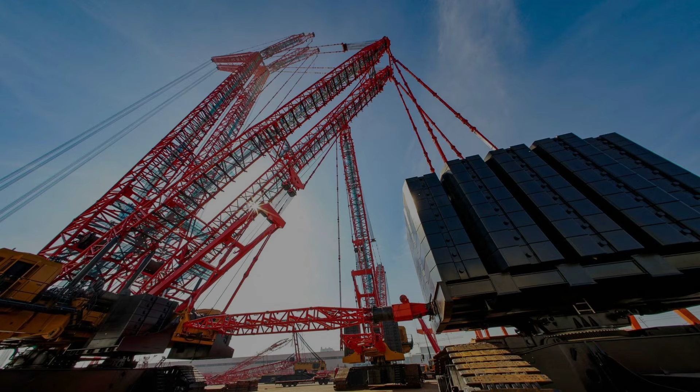In 2021, a single Chinese crane lifted 4,500 tons, shattering every previous engineering record and pushing human precision to 0.5 millimeter. By 2024, giants even larger could drive themselves 500 kilometers across open highways, cutting project times and costs overnight. Billions now hinge on these machines. One calculation off means disaster, and yet their mobility could rewrite the economics of global energy.

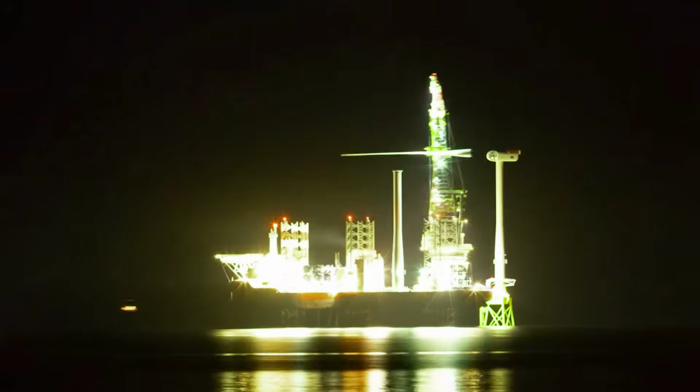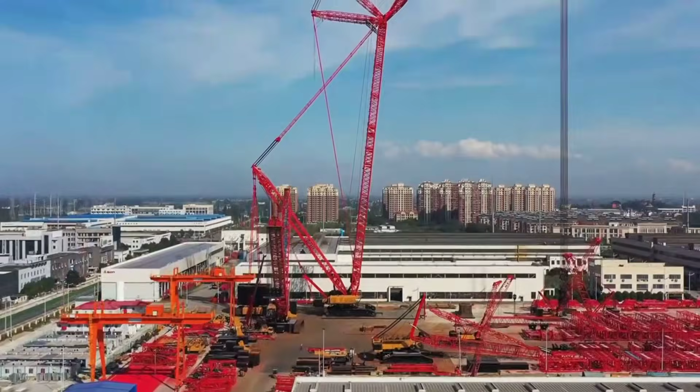How did China leap so far ahead? And where does this race for power lead when steel and physics finally reach their limit? Steel towers arch skyward, dwarfing city blocks and shipyards alike. At the heart of this engineering contest stands the Sany SCC45000A, a mobile crawler crane whose statistics read like science fiction.

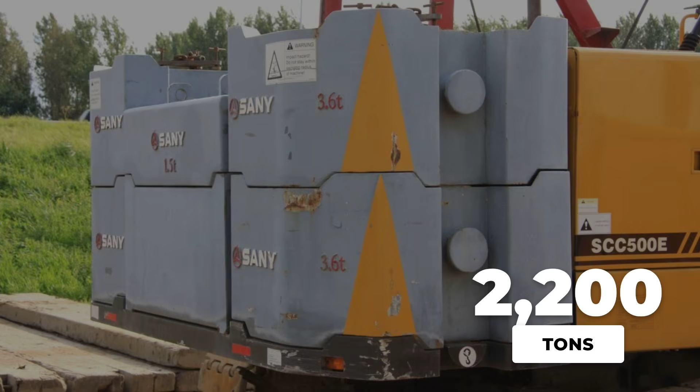On October 13, 2021, it hoisted 4,500 tons in a single lift, an act that required 98,000 ton-meters of force and a boom stretching up to 216 meters. The foundation of this feat is a counterweight system totaling 2,200 tons, balanced with laser alignment to within 0.5 millimeter.

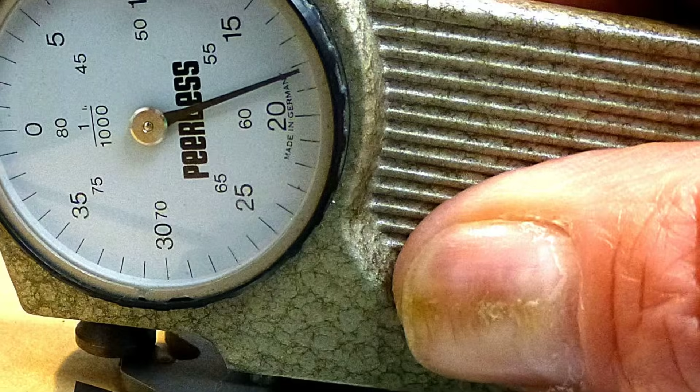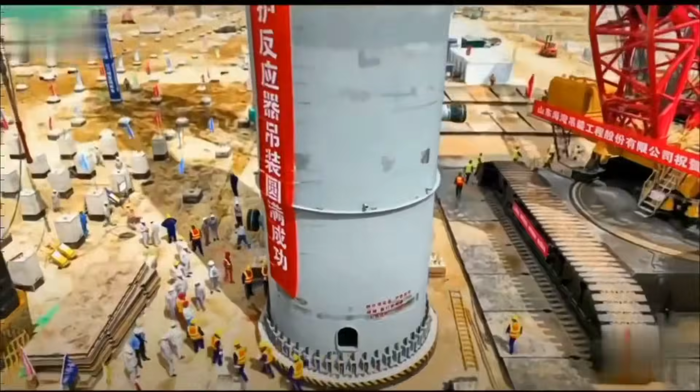Operators describe the process as walking a tightrope with steel and concrete, where a deviation smaller than a fingernail could send $500 million in equipment crashing to the ground. Behind the numbers, the SCC45000A is more than just brute force. Its modular design means 95% of its parts are interchangeable with Sany's other ultra-heavy cranes, allowing it to be split into two 2,000-ton machines for complex sites.

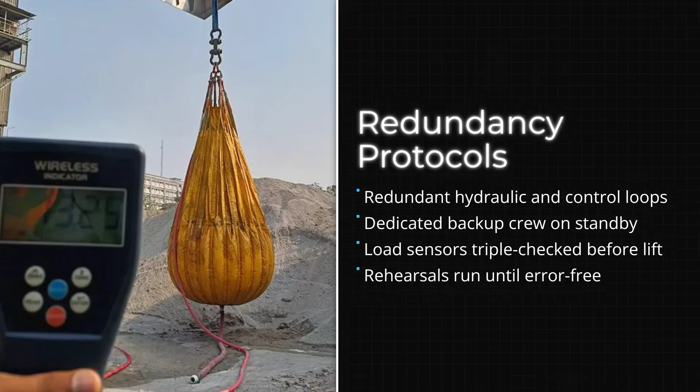The logistics are staggering. Moving the crane demands at least 200 flatbed trucks, and assembly is a ballet of engineers, riggers, and sensor teams. According to Sany's lift planner, every major operation is a rehearsal for disaster. Redundant systems, backup crews, triple checks on load sensors, and redundant rehearsals are mandatory. One missed reading, and you lose everything.

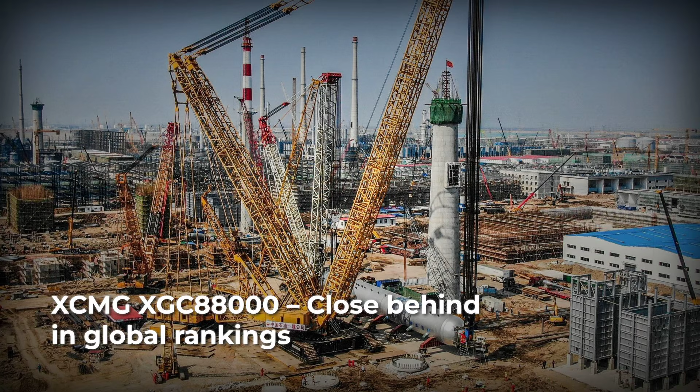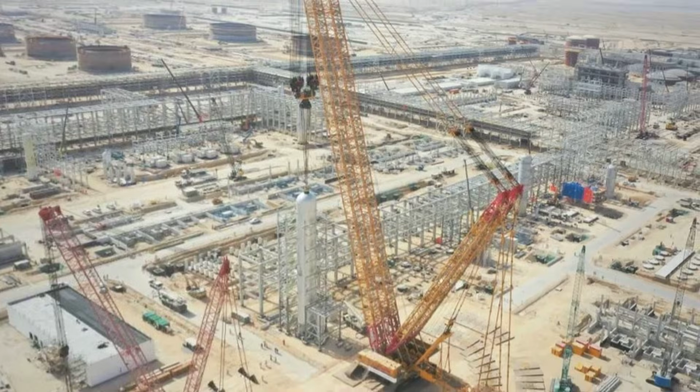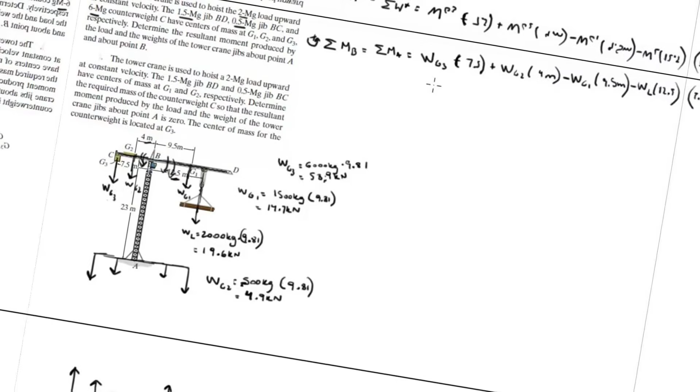The XCMG XGC88000, close behind in the global rankings, boasts a 4,000-ton capacity, powered by 3 Cummins engines, delivering nearly 2,000 kilowatts. Its boom also stretches 216 meters, and the entire structure is designed for rapid reconfiguration on petrochemical sites and offshore platforms. In these environments, the load moment, the product of weight and distance from the pivot, becomes the ultimate test. An 88,000 ton-meters moment means the crane must counteract forces that would buckle most city bridges.

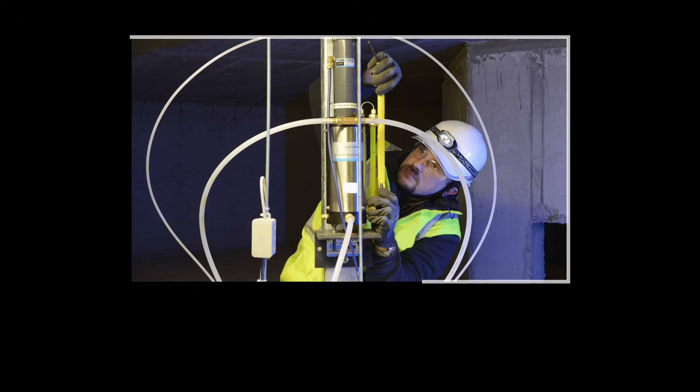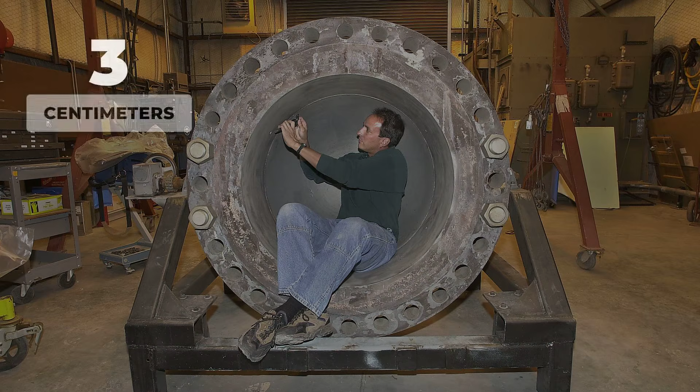The margin for error is measured in tenths of a millimeter, monitored by laser-guided systems and ground settlement sensors that halt operations if the Earth shifts by as little as 2 millimeters. On the nuclear frontier, the Sany SCC36000TM specializes in precision. This 3,600-ton giant is engineered for reactor dome placement, where 3-centimeter accuracy is not a luxury,

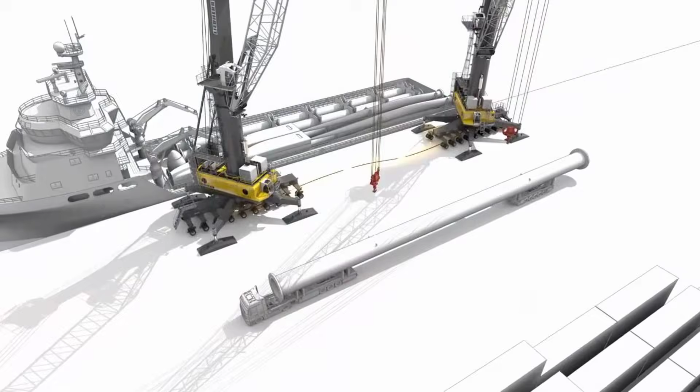but a regulatory mandate. Its laser guidance system, combined with adaptive control algorithms, synchronizes every movement of the boom and counterweight. During a typical reactor lift, ground teams monitor live data from gyroscopes and strain gauges, making split-second adjustments to keep the load perfectly vertical. The consequences of error are measured not just in dollars, but in lives and national safety.

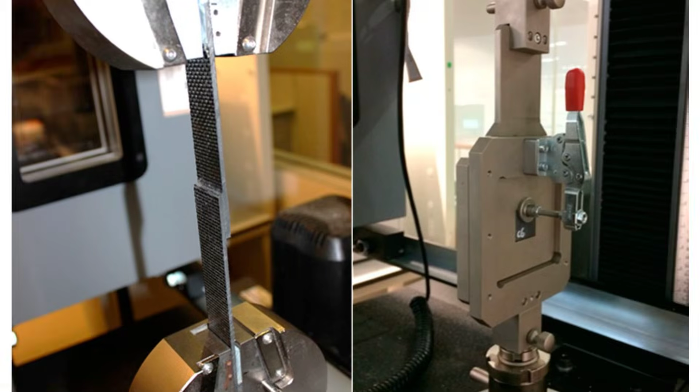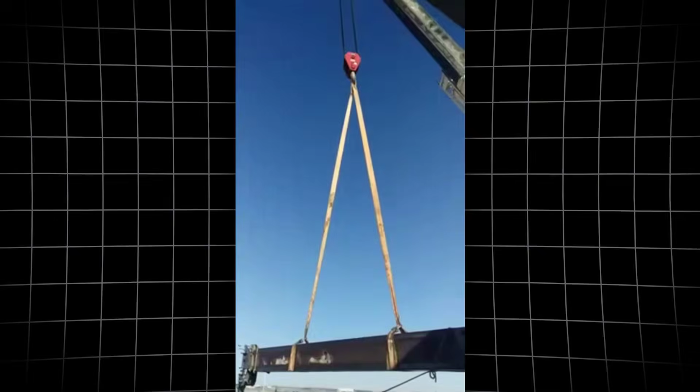Together, these 3 cranes represent over $15 billion in market value and the physical limits of what current materials and engineering can achieve. Each year, they complete dozens of major lifts, with documented safety records built on thousands of hours of incident-free operation. Yet the industry has reached a point where adding more steel or height is no longer the answer. The race for raw tonnage has collided with the boundaries of physics. What comes next is not just about size, but about how these giants move, adapt, and redefine the economics of construction and energy on a global scale.

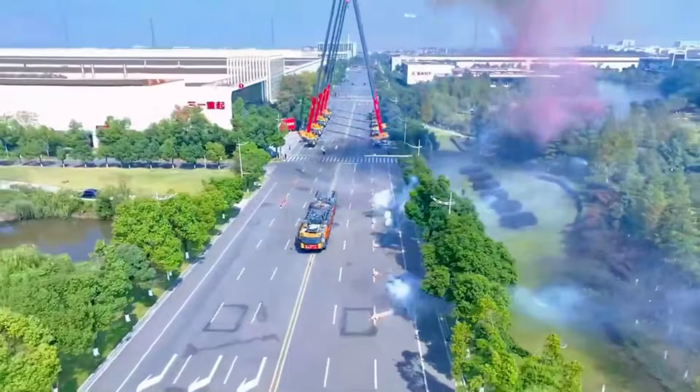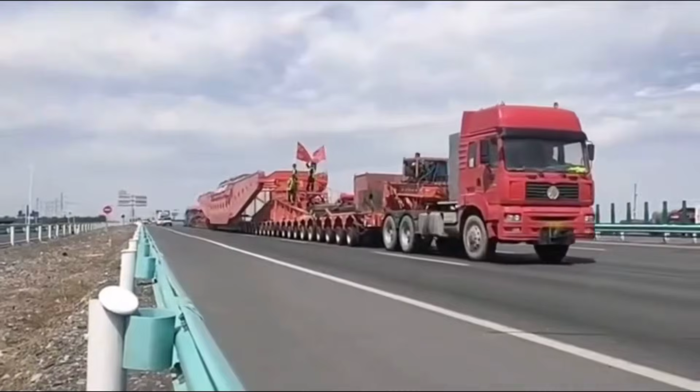On a cold December morning in Inner Mongolia, a machine the length of a blue whale rolled off the expressway under its own power. The Sany SAC40000T, delivered just weeks earlier, arrived at a wind farm site not by train, nor by a convoy of hundreds of trucks, but as a single, road-legal unit. This was no ordinary move.

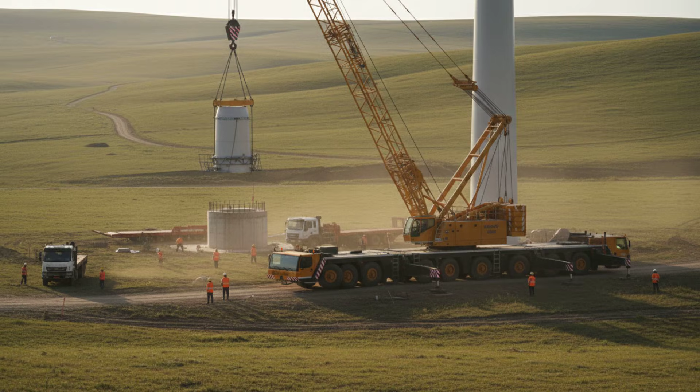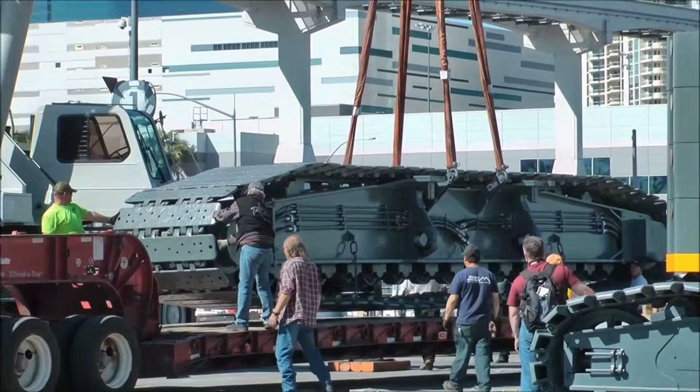The savings were immediate. In the past, relocating a crane of this size between wind farms meant shutting down roads, dispatching 200 or more trucks, and spending over a month on disassembly and reassembly. Each move could cost $2 million in labor, permits, and lost time. With the SAC40000T, the team covered 500 kilometers between sites, cutting deployment from 45 days to just 12.

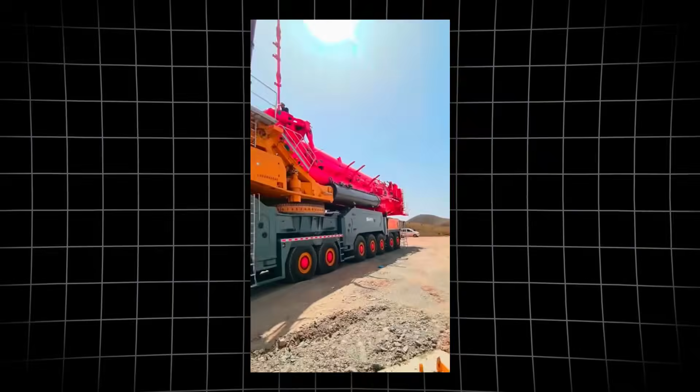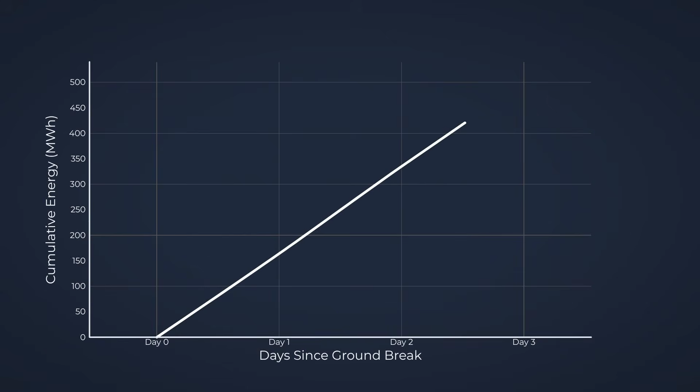During the 6-week pilot, crews installed 18 turbines, each tower rising over 150 meters without pausing for the traditional bottlenecks of logistics. The difference was measured not just in time, but in money. The reduced downtime meant the wind project generated power weeks ahead of schedule, unlocking revenue that would have otherwise been lost.

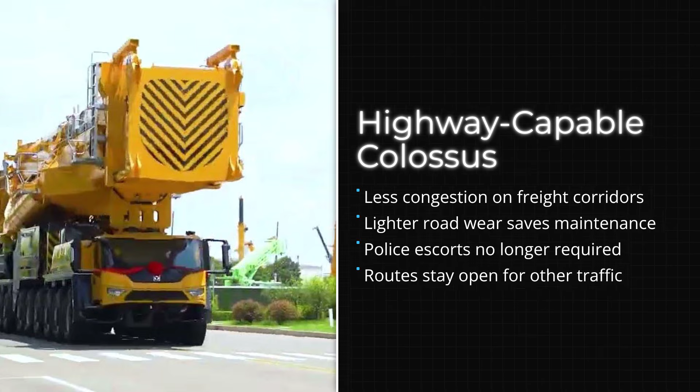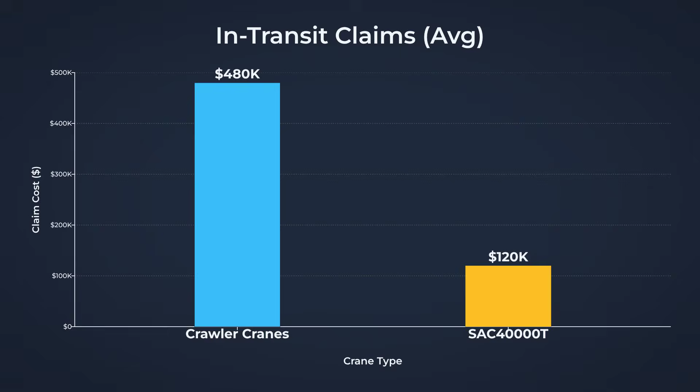Logistics contractors on site noted the ripple effect. Fewer trucks meant less congestion, lighter road wear, and no need for police escorts or route closures. The crane's design, distributing weight across 540 wheels, allowed it to cross bridges and highways engineered for China's new energy corridors. Insurance underwriters, usually wary of moving such massive loads, reported lower claims for in-transit losses compared to traditional crawler cranes.

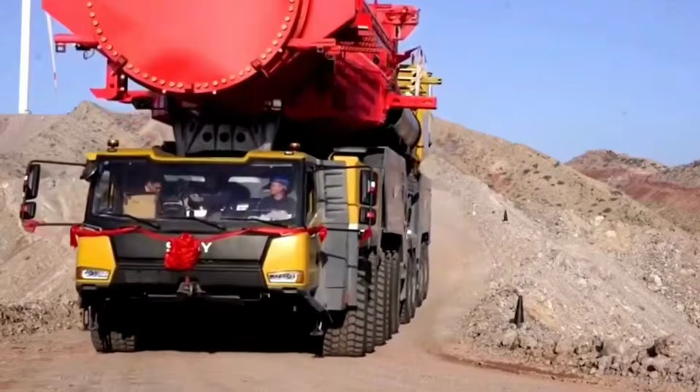The SAC40000T's mobility is more than an engineering showcase. It is a calculated answer to the demands of China's fast-growing wind sector, where a missed weather window can stall a project for months. For project managers, the ability to relocate a 4,000-ton crane in days, not weeks, means capital is freed up and assets are never idle.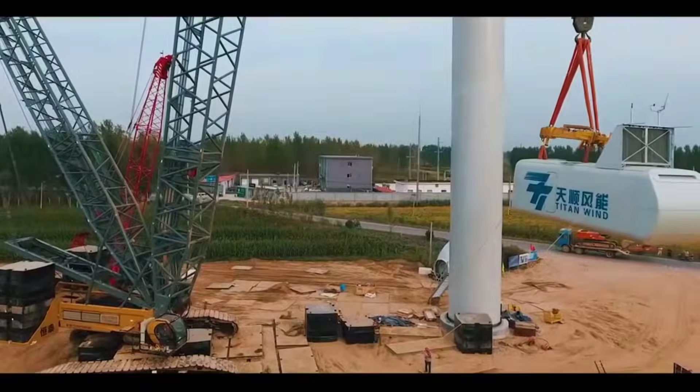Yet this mobility comes with boundaries. The same 9-axle, road-legal design that powers across China would be blocked at the border in Europe or the United States, where axle weight limits and fragmented permitting regimes make such machines illegal on public roads. For now, the true impact of the SAC40000T is felt where modern highways and regulatory fast tracks align, primarily in China's interior, where wind farms race to meet national energy targets.

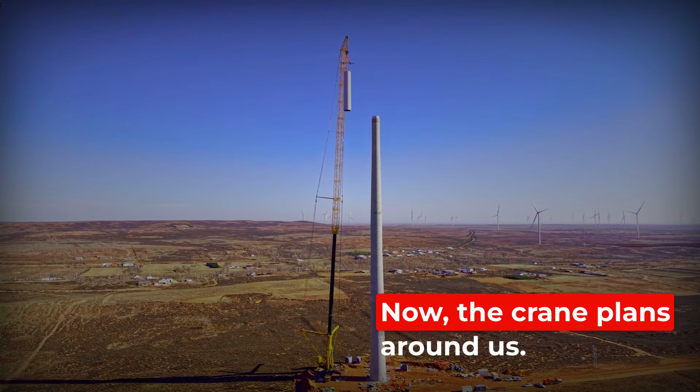As the industry pivots from pure lifting power to deployment speed and cost efficiency, the SAC40000T stands as proof that the future of heavy lifting will be decided as much by how quickly a crane can move as by how much it can lift. In the words of the Inner Mongolia project manager, "We used to plan around the crane. Now, the crane plans around us."

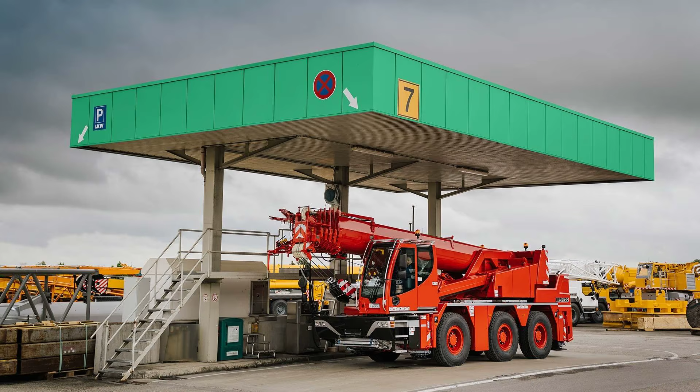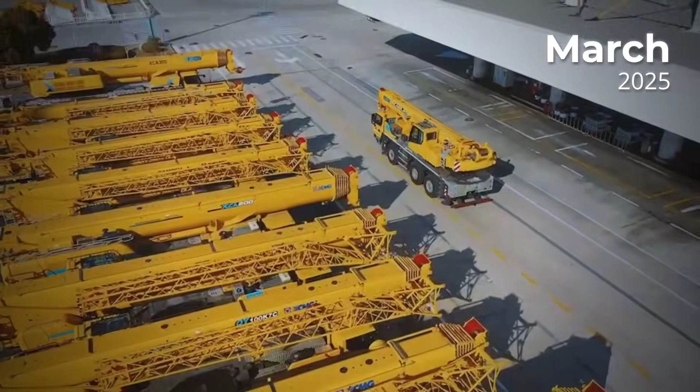Diesel engines have powered the world's largest cranes for decades, but the industry's appetite for fuel is staggering. A single heavy lift shift can burn through 2,400 liters, equal to the daily emissions of 80 passenger cars. With 2030 carbon neutrality targets looming in both China and Europe, regulators are forcing manufacturers to rethink every aspect of crane propulsion. In March 2025, XCMG introduced the XCA60EV, a 60-ton hybrid crane designed to cut fuel consumption by 65%.

It is a partial solution, effective for smaller lifts, but the physics of batteries and motors have yet to scale for the true giants. For cranes above 1,000 tons, diesel still dominates, as the energy density required for multi-hour operations remains beyond current battery technology.

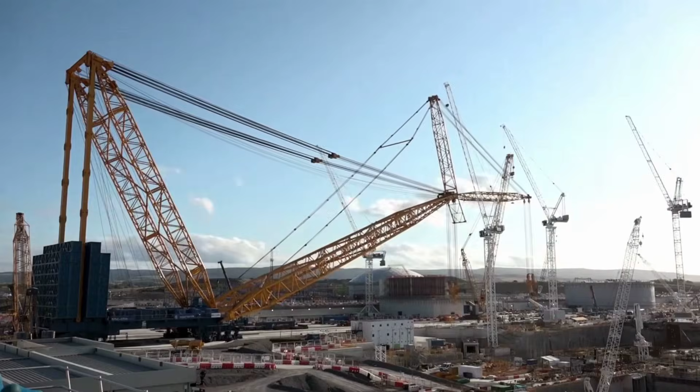The push for electrification is most visible in Europe, where Sarens announced the SGC170 in July 2025. This 3,200-ton ring crane, slated for the Hinkley Point C nuclear site in the UK, runs on 12 grid-connected electric motors, delivering zero on-site emissions. But the trade-off is clear. After 4 hours of lifting, the crane requires 8 hours to recharge.

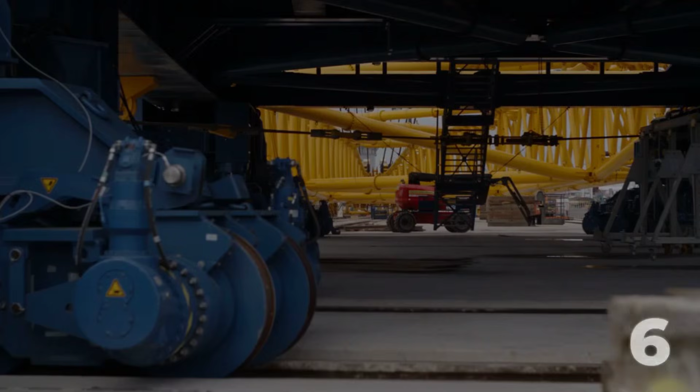The grid dependency poses a risk. Any power outage can halt critical lifts for an entire shift. As one Sarens project lead put it, you can't afford to gamble on the grid when a billion-dollar reactor dome is hanging mid-air. Hydrogen fuel cells are being tested as a possible answer.

XCMG's prototype, reported in early 2025, promises 12 hours of continuous operation on a single fill, but the technology is still in pilot phases. For now, electrification is driven by regulation, not by market demand. Every incremental gain in efficiency has become a prized advantage in export bids, but no one claims the race is over. The world's largest cranes still run on compromise, balancing power, emissions, and operational risk, one lift at a time.

In 2006, China's State Council added super heavy cranes to its national priority technology list.

That single policy decision unlocked a wave of state-directed support. Provincial governments offered free land and tax breaks to any manufacturer willing to take on the challenge. State banks, acting on central directives, extended loans at just 0.5% interest, rates that Western rivals could only dream of.

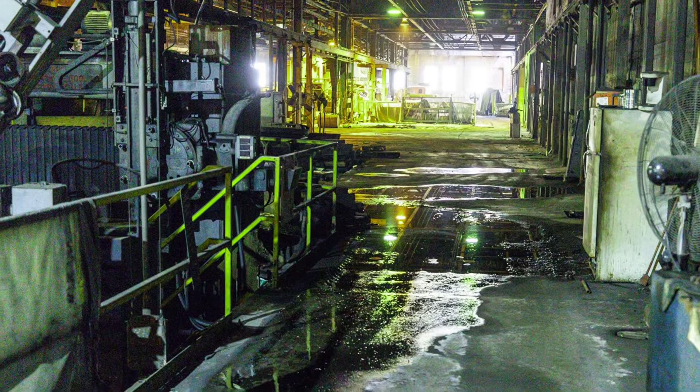By 2010, the consequences were already visible. Nuclear and petrochemical projects across China stalled for months, waiting for foreign cranes that never arrived on time. The strategic bottleneck was clear to policymakers and entrepreneurs alike.

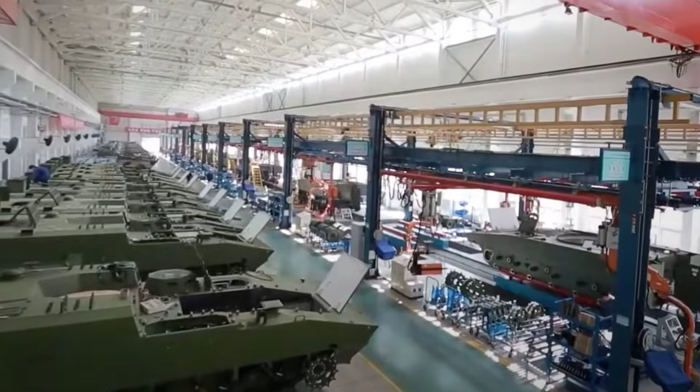Liang Wengen, a former arms factory manager from Hunan, recognized the opportunity. With deep ties to both the military-industrial complex and provincial officials, he secured favorable terms for his company, Sany. His approach went beyond cheap capital.

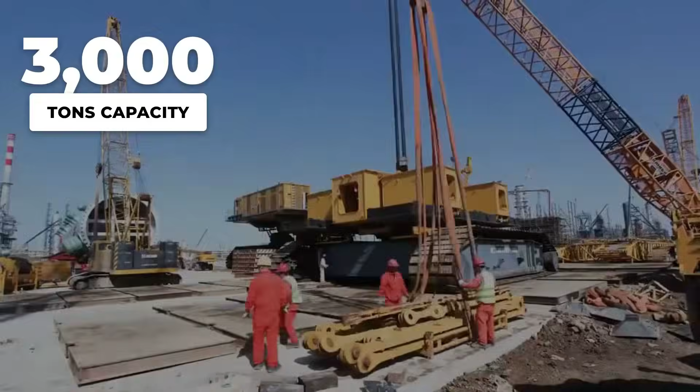By vertical integration of supply chains, steel, sensors, control software, Sany could outpace Western competitors who relied on quarterly returns and fragmented suppliers. The result? By 2015, Chinese-built cranes surpassed 3,000 tons in rated capacity, a milestone that broke the last technical barrier held by the West. A policy analyst reviewing this period describes it as the Great Compression.

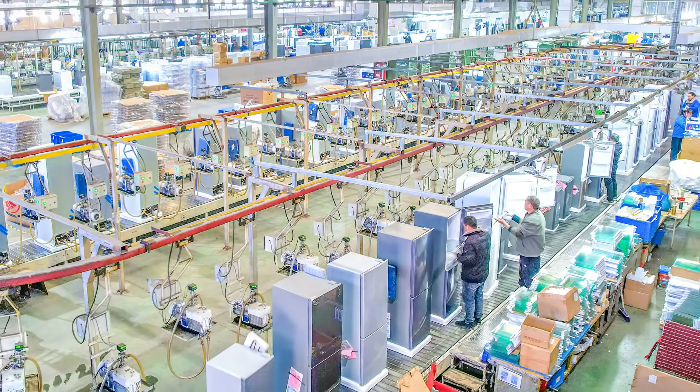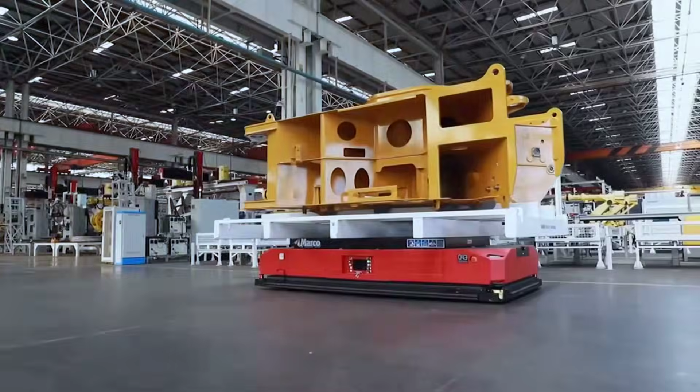Two decades of Western development replicated in less than 10 years through a combination of state capital, patient investment, and relentless iteration. By 2025, the numbers told the story. Chinese manufacturers controlled 61% of the global super heavy crane market, a dominance built not just on engineering, but on the machinery of policy and finance. Liang Wengen's net worth soared past $17 billion, a testament to how state priorities can reshape entire industries.

The economic engine behind China's crane empire was never just about steel and hydraulics. It was about aligning national ambition with financial muscle. 12 new heavy crane models rolled out of Chinese factories in 2024, each one a response to relentless competition among Sany, XCMG, and Zoomlion. An industry analyst described the pace as a product cycle on fast forward, with rival teams racing to outdo each other in capabilities and cost.

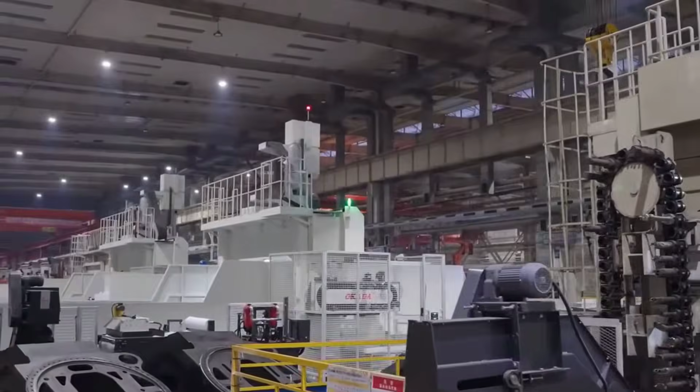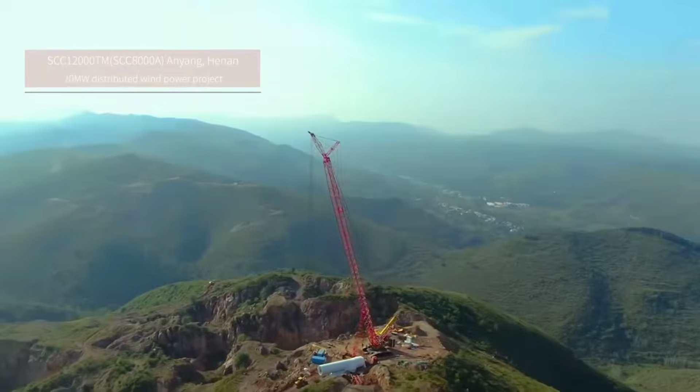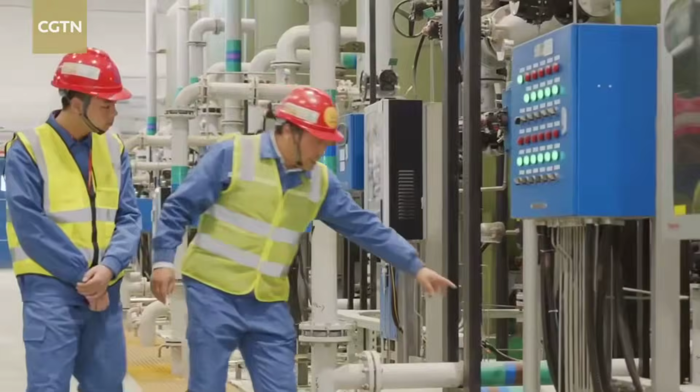XCMG has carved out a lead in petrochemical plants, fielding self-assembling cranes that minimize risk around flammable modules. Sany leads nuclear construction, leveraging laser guidance systems capable of 5-centimeter placement accuracy, a standard verified on reactor sites by independent inspectors. Zoomlion, the third force, is pushing vertical reach boundaries, setting an 82-meter aerial record for offshore wind platforms.

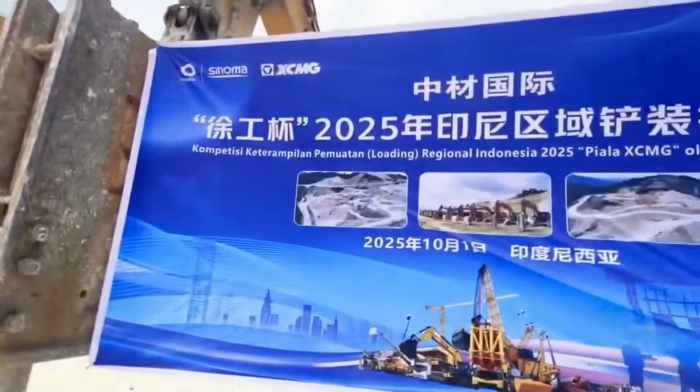This rivalry is not just about technical bragging rights. Export records show that Chinese cranes now enter global bids at prices up to 40% below Western equivalents. Procurement directors in Southeast Asia and Africa confirm that choosing Chinese means both lower cost and more frequent technical upgrades. According to one analyst, internal competition compresses years of Western development into a matter of months.

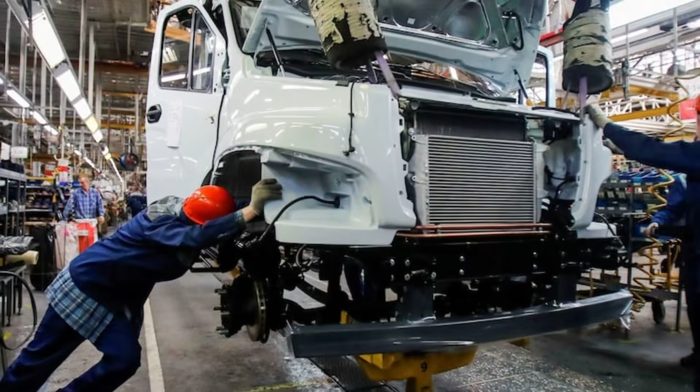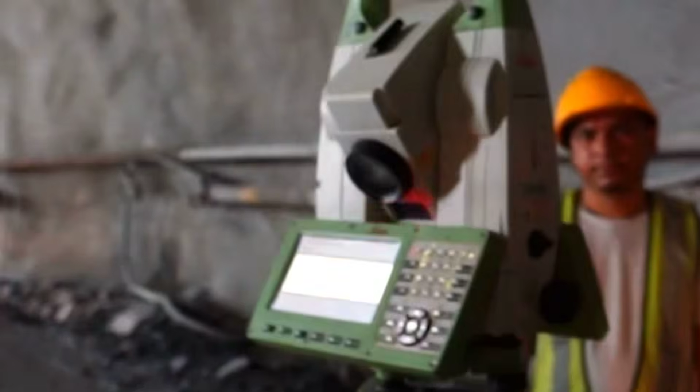Yet as the machines grow more complex, safety architecture has become just as fierce a battleground as raw power. A senior safety engineer explains that every lift is monitored by triple redundant load sensors. If even one disagrees, the system locks out movement instantly. 5 wind sensors spaced along the boom halt operations if gusts exceed 12 meters per second. Laser ground settlement monitors detect shifts as small as 2 millimeters, preventing catastrophic tipping.

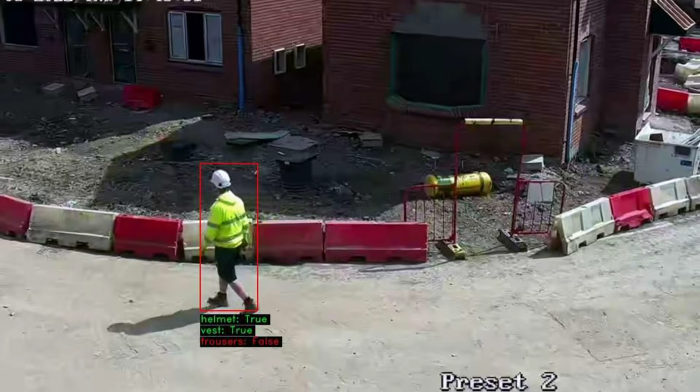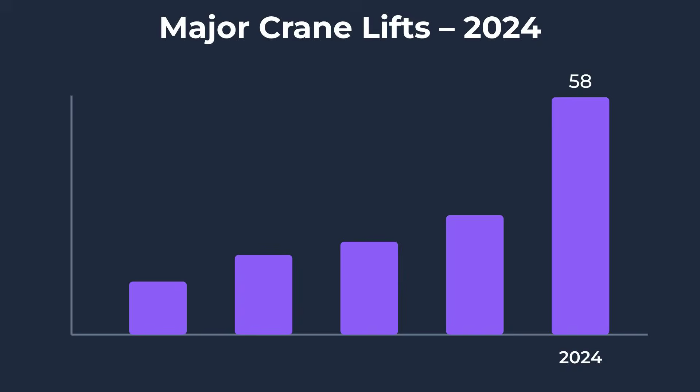AI cameras watch exclusion zones, sounding alarms if a worker enters danger. Gyroscopes and strain gauges feed adaptive controls, updating 100 times per second. These layers of redundancy are refined through 50 or more major lifts per crane each year, shaping a safety record that underpins every export contract. In the words of the safety engineer, trust is built not on claims, but on thousands of incident-free lifts, logged and reviewed after every job.

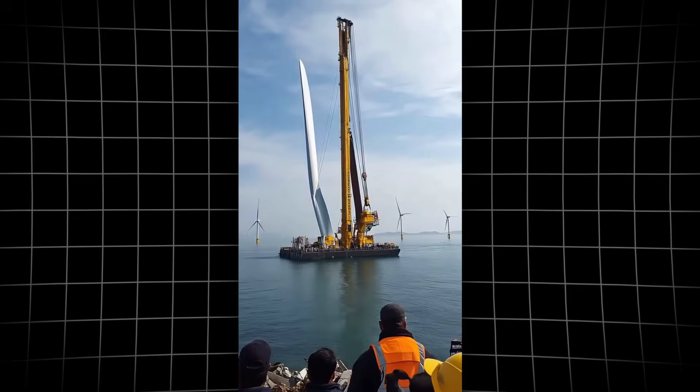A floating platform rises and falls with the gray-green swells of the East China Sea. On deck, the XCMG XGC88000 stands ready, its boom reaching out over water deeper than most city towers are tall. In August 2025, project planners in Jiangsu prepared for a lift that would test the limits of both steel and sea. The target was a 26-megawatt offshore wind turbine with a 185-meter hub height and a nacelle weighing nearly 1,000 tons. Above, a rotor sweep of 77,000 square meters would soon claim the title of the world's largest. This scale demands more than raw power.

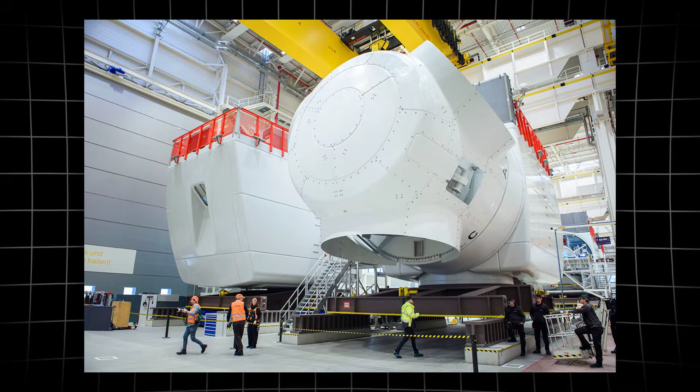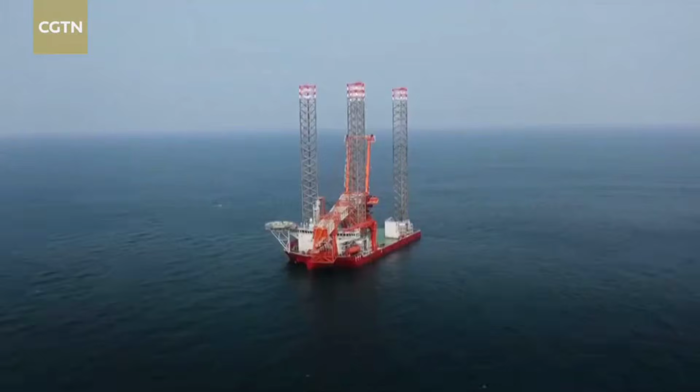Each of the 200 bolts securing the nacelle had to align within millimeters, all while wind gusts pushed at 15 meters per second and the deck pitched beneath the crane's hydraulic wave-dampening legs. The planner in charge described the challenge, saying that every lift is a negotiation with the weather. "We have a 2-hour window, miss it, and you lose a week."

Marine adaptation is now standard for these giants. Corrosion-resistant alloys shield every joint, and hydraulic legs anchor the crane against unpredictable swells. As global offshore wind capacity heads for 380 gigawatts by 2030, every successful installation translates to new power for millions.

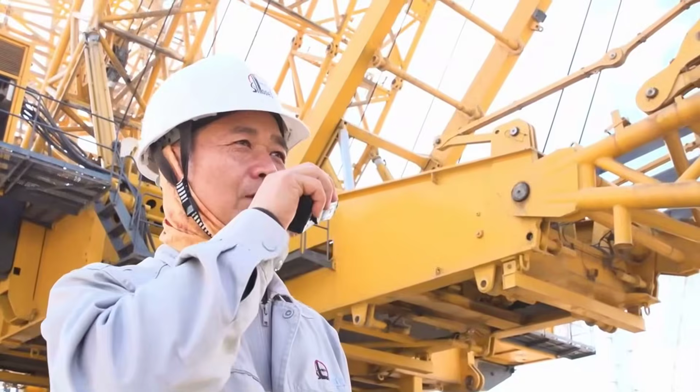The real contest is not just about who builds the biggest turbine, but who controls the machines that make such projects possible. In this race, mastery of heavy lift technology is shaping the future of green energy one lift at a time. Chinese crawler cranes now work on construction sites from Lagos to Lahore, but the real power lies in the agreements that travel with them.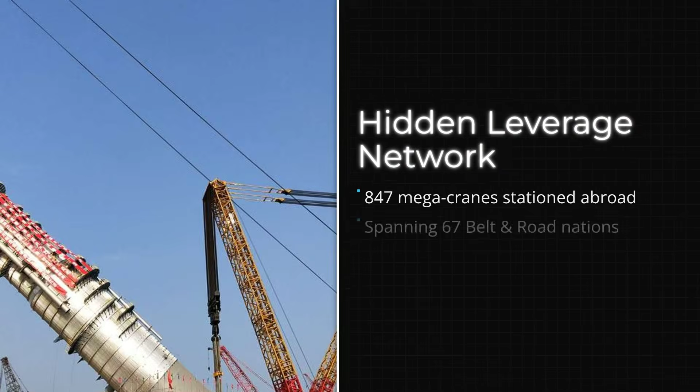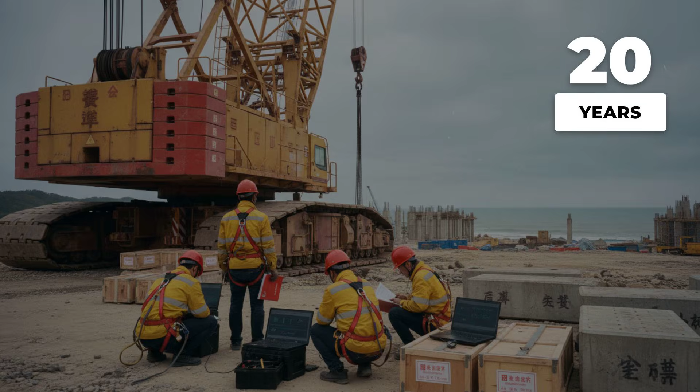As of 2025, 847 super-heavy Chinese cranes operate across 67 countries, their presence secured by $66.2 billion in Belt and Road contracts signed in just the first half of the year. These deals go far beyond hardware. Procurement contracts routinely require a 20-year service and maintenance commitment, embedding Chinese technicians at project sites for decades.

At Pakistan's Chashma nuclear complex, the reactor dome could not be placed without Sany cranes, and the contract stipulates that only certified Chinese parts and staff can be used for critical operations. If a host country tries to switch suppliers or use non-Chinese components, warranties and operational certifications are immediately voided.

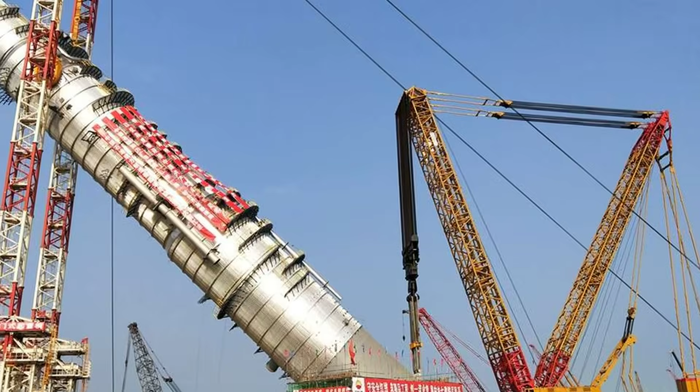A procurement official involved in a recent African refinery project put it plainly: "We get the crane, the financing, and the staff. But after that, we depend on China for every major lift, every part, every inspection for the next 20 years." These service clauses ensure that each crane is more than a machine. It is a long-term lever of influence, locking in technical standards and shaping infrastructure decisions for a generation.

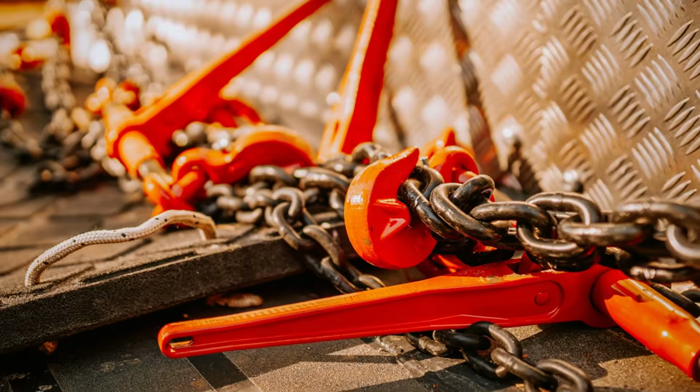The result is a dependency that cannot be unwound with a single contract or a change in government policy. Every major lift becomes a renewal of that relationship, cemented by technicians, spare parts, and the quiet presence of Chinese engineers on site.

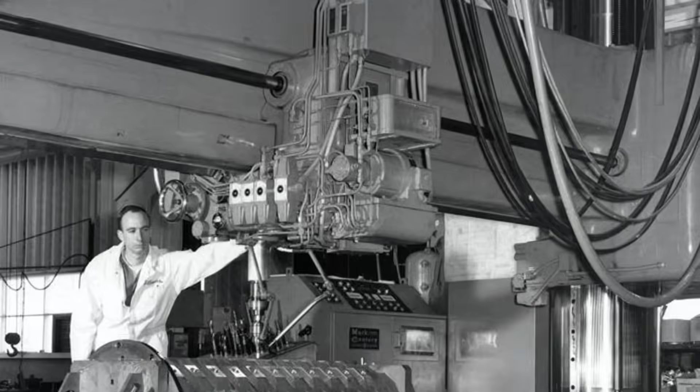Inside a boardroom in Rotterdam, a Western crane executive studies market charts that tell a harsh story. In 2005, European and American manufacturers held 78% of the global heavy lift crane market. By 2025, that share has plunged to 38%.

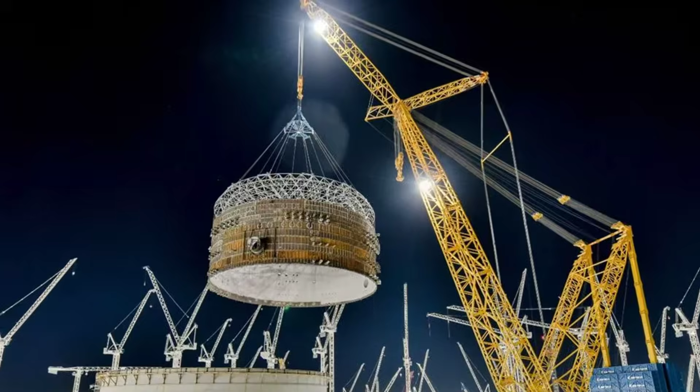The industry's most powerful Western-built crane, Big Carl, a 5,000-ton stationary ring crane, stands at Hinkley Point C in the UK, but its fate is sealed. Assembled once, it will be dismantled and scrapped after the project. Mobility, once the Western edge, is now China's domain.

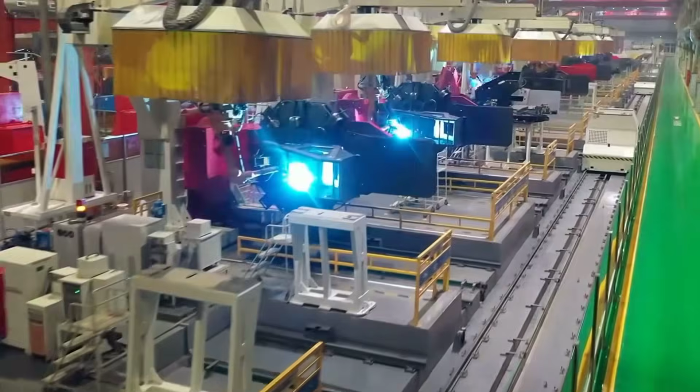Faced with this reality, Western firms are pivoting to specialized niches and digital innovation. Liebherr caps its largest mobile models at 3,000 tons and focuses on premium European contracts. Manitowoc and Tadano have retreated to lighter segments and service agreements.

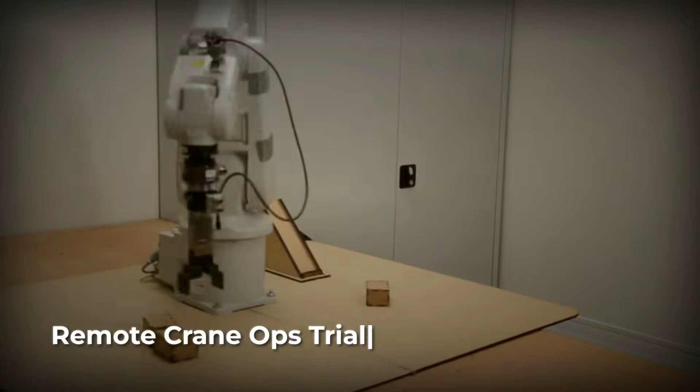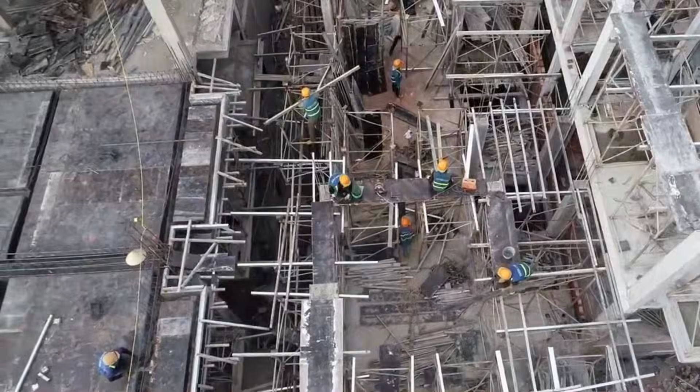Their strategy now revolves around software, AI-assisted lift planning that calculates rigging and load paths in seconds, and digital twins that predict maintenance needs before a fault brings a project to a halt. An academic specializing in construction robotics points to remote operation trials, cranes piloted from hundreds of kilometers away, reducing labor costs and safety risks. But the stakes run deeper than the next contract.

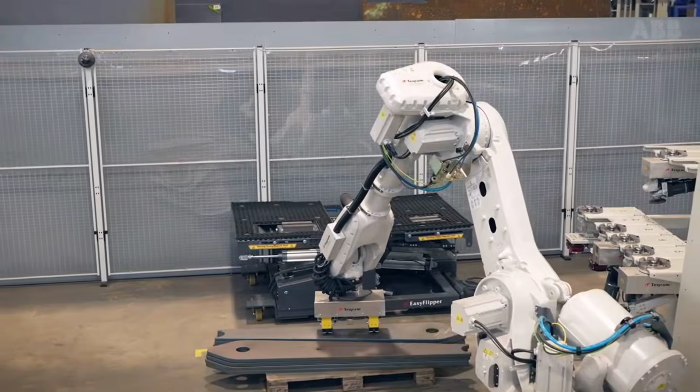Security memos from U.S. port authorities warn of potential surveillance risks from Chinese-manufactured cranes embedded in critical infrastructure. The debate intensifies as projections show Chinese manufacturers could reach 75% of the global super-heavy crane market by 2030. The policy choice is stark. Invest billions to rebuild domestic capacity and regain control, or accept long-term dependency on foreign machines for the infrastructure of the future.

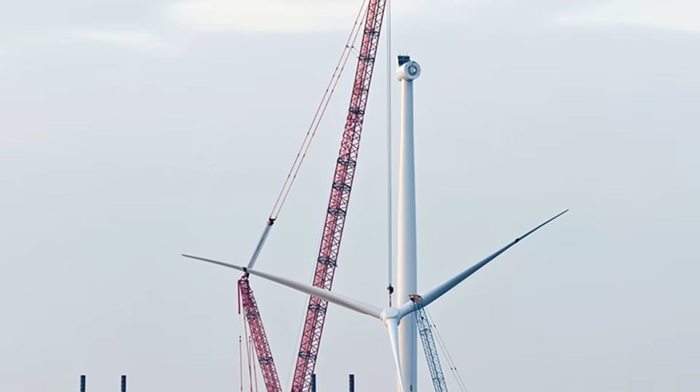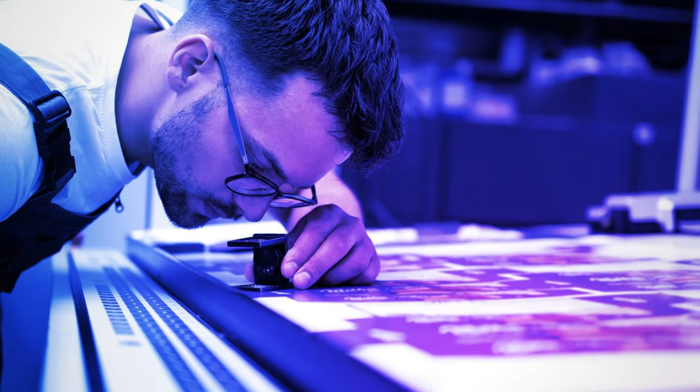Right now, over 60% of the world's super-heavy lifting power answers to one nation, reshaping global infrastructure, supply chains, and energy ambitions. As the next decade pivots on clean energy and rapid construction, whoever controls these machines controls the future's foundation. The question is not just about engineering muscle. It is about who sets the rules for the world we are building next.